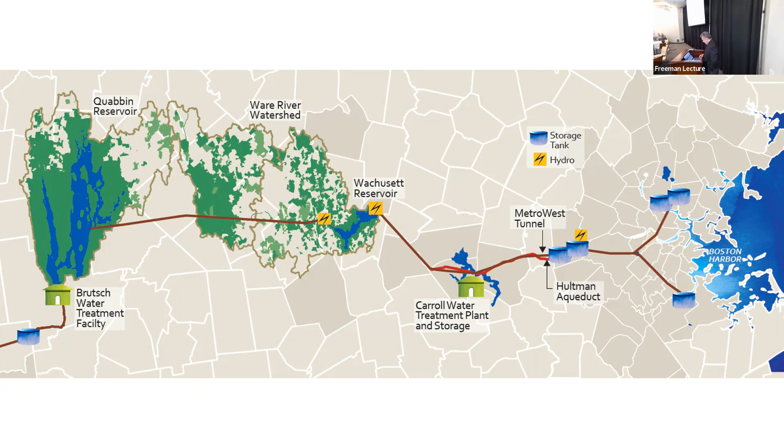Now you've got to know, when I talk tonight, I've got to bring this down a couple of levels, because some of you design highways and get real excited about travel lanes and super elevation. I've got to help you out with what bothers us. So if some of this stuff seems rudimentary, it is, but I'm trying to uplift you.

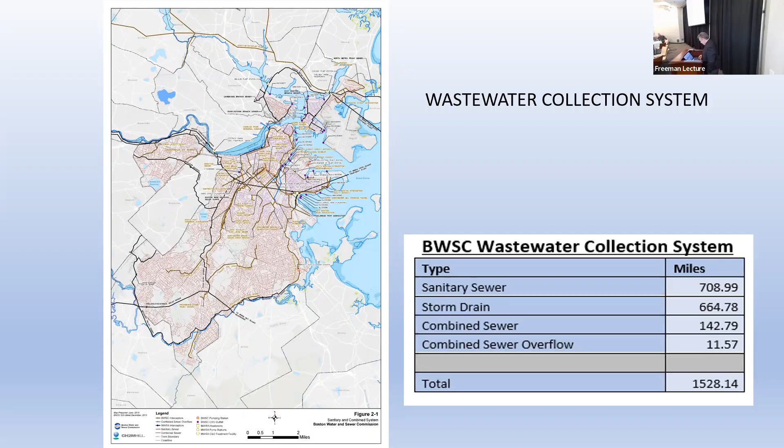We're also studying how we keep the people at the other end, in the southern part of the city, dry also. We have fixed infrastructure, you can't fit any more pipes in these streets. So if we get a lot of rain, sometimes you're going to have to run it down the street or through your backyards, because we can't get it down into a pipe. So you've got to route it or hold it. Now we try to hold it, not in your cellars, that's a plus.

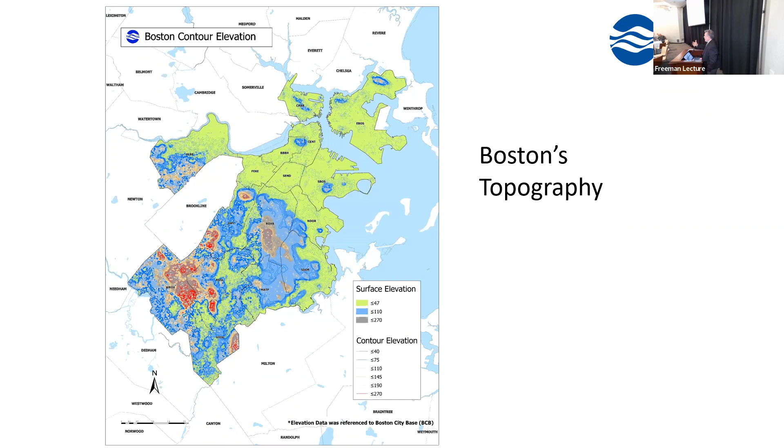And if we're not careful, that's what it's going to look like if we don't take care of our problems with sea level rise. Nature's going to come back and put us back where we were. Now, the only thing I wish is that when they were filling in the Back Bay, etc., they had a brother-in-law that sold dirt and put in an extra 5 feet, but that didn't happen. We came to the elevation that we knew at the time. It worked well, we were high enough. And now we have an issue.

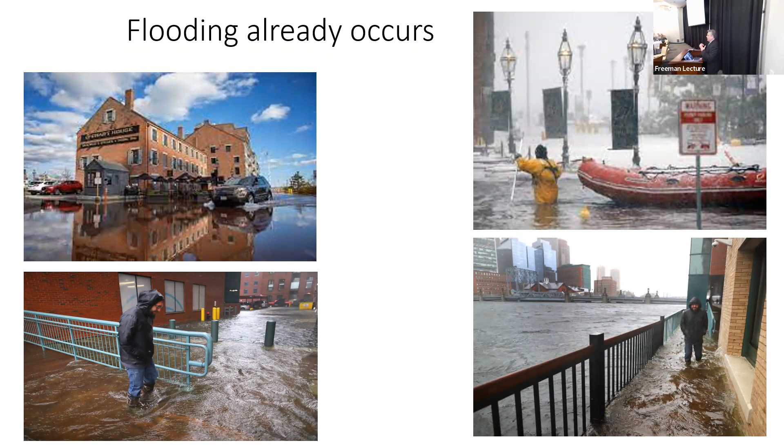So we already have flooding. Flooding already occurs at king tides. If you get on the long walk, you'll see it come over at Tenean Beach, the water comes over. That's along Fort Point Channel. The water comes up on extremely high tide. So we already have it, so we know that's a problem. It doesn't take genius, and we're not going to spend a lot of time studying that, because that's what happens.

City of Boston has done an incredible job studying climate change. They've been doing all kinds of studies. People don't realize how much is there. At Climate Ready Boston, if you Google that, there are studies galore. And they continue to improve also. But we're all learning, all of us. And so we get new information, we'll change it again. And that's what's so important about this, continual learning.

They have two big issues: the heat island effect, which we won't cover tonight, and the issue of resilient harbor. These six boxes show the studies they've done, and you can pull them all up. They did an incredible job working with the residents of the neighborhoods, going around and asking them what do they need, what do you think, how are we going to keep the seas from coming and getting us?

It's extremely important that the residents understand and buy into it, because this magic thing occurs: we want to build something, we need money. Where do we get the money from? We get it from the residents.

So this is important, number one. Number two is renters. You can't assume that people are just going to say government's going to take care of you. Everyone has to be working on this together, because if we have a major problem here, we've got to put people somewhere. We have to find a place to put them, we have to put them up, we have to take care of them. That's why everyone needs to be cognizant that climate change is occurring, and everybody has to be part of it. Everybody has to be willing to add their ideas and take a little hit now and then, a little hit off the chin.

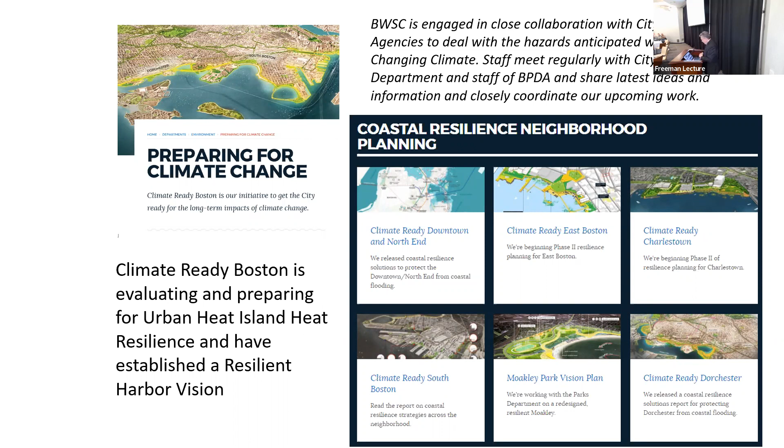2050 is right around the corner. Now, if you don't think so, think what you were doing in the year 2000 — it wasn't that long ago. Now here we are calling in 2022. You'll be reviewing these slides, I know it, for the next 8 years, wondering what the hell happened in 2030 with our predictions. But we continually update them. This is a given thing — this is the new science that tells us this is happening.

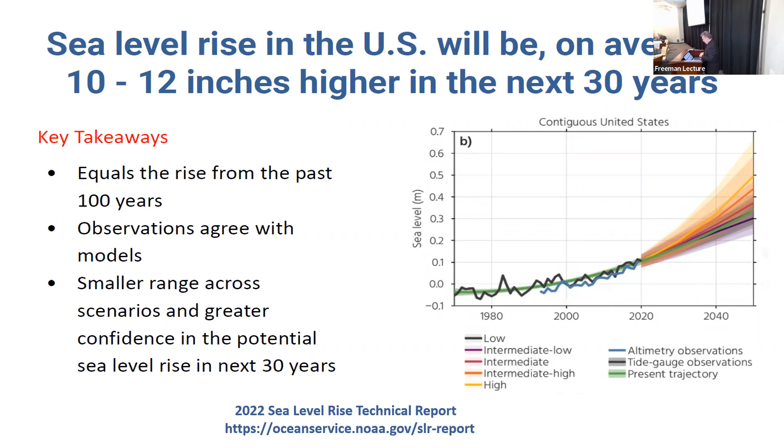It's very important that we look at these and we continually revise them, because people will start building mini levees, et cetera, when they do construction. But it doesn't do you any good because you've got a weak link in every chain — you've got to get the entire thing.

This is something that we keep mentioning to the planning agency also — we have to come up with consistent ways of doing this, they've got to match together. If you're going to build something and you don't know whether the sea level rise is going to be 5 feet, you should make the foundation capable of taking 7 feet of levee. Build your foundation big now — costs a little more money. You don't have to wall the city off yet, but you better have that foundation there, because if we miscalculated, it's going to cost a lot more money to go back and take care of the problem. Or you buy a lot of lifeboats.

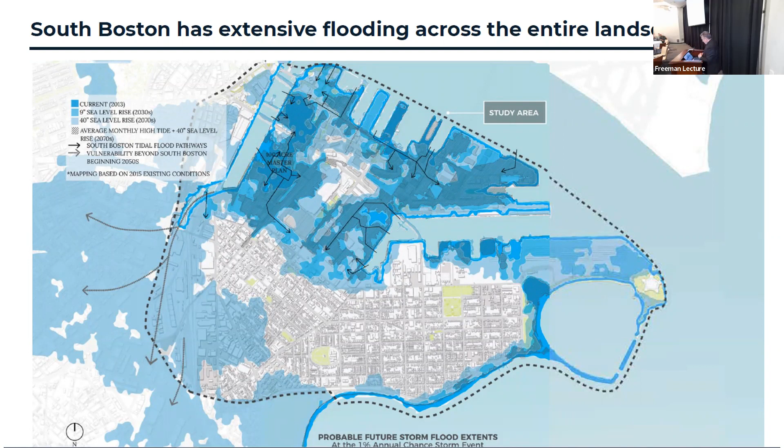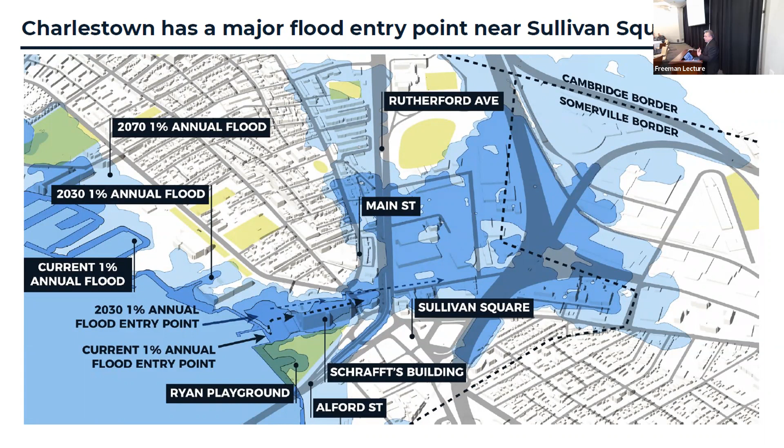The problem is consistency. Everybody's leaving jobs, everybody's disappearing, everybody's retiring, and how do we keep this actively going so that we consistently move towards fixing the city, protecting ourselves, and building what we need to build.

This one here is East Boston, another high flood risk. I wanted to show you this one because I'm going to explain in a minute why the water and sewer department cares about this. I mean, you go on TV and you see devastating floods everywhere, rivers coming up, people living on slab foundations, and their living room furniture floats out to the front lawn — you can replace all that. But we have cellars in the city, and these cellars have been converted to living spaces.

People live there, and that's where we put all our utilities. They're all sitting down there, brand new, and we're all happy about them. Nobody thinks about them because we haven't had the problem yet. We at the commission are extremely concerned about what could happen if this particular one in East Boston hit.

This area here is combined sewers. So with combined sewers, the water wants to go into the catch basin, into the sewer. And this is an unlimited source of water - we call it the ocean, and it'll just keep coming. The good news is there's a thing called low tide.

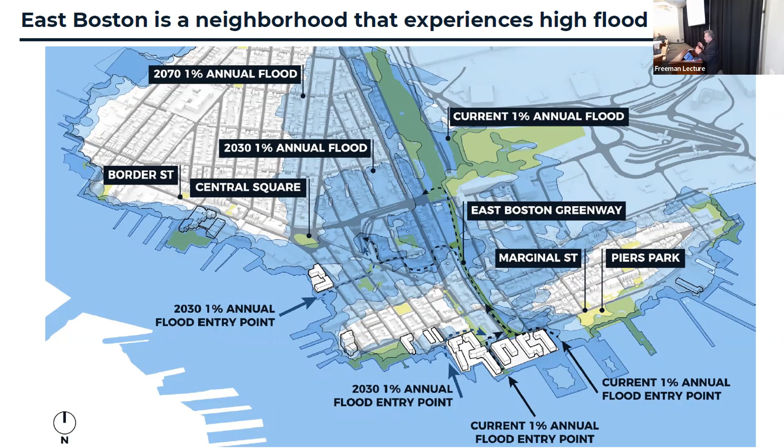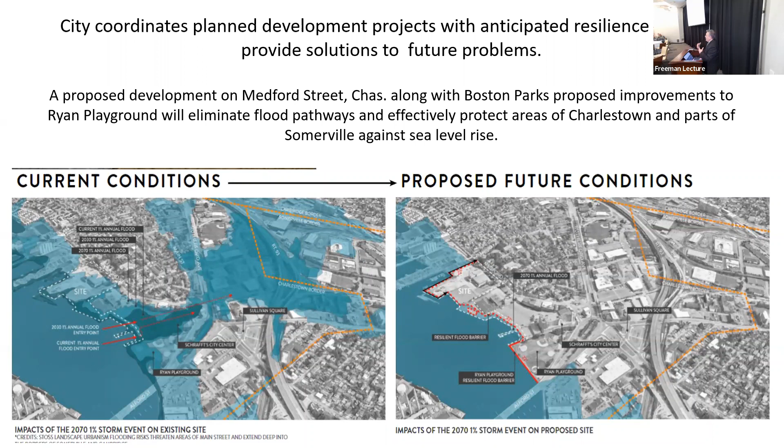So here's an example where the city is cooperating very well. You saw the flow path on the side you're looking at. The city is planning on taking care of Ryan Park - that's the lower piece on that diagram with the red. As they're planning that, the developer at 425 Medford Street is also planning to develop his waterfront. Between the two of them, they will build what we need here. At the end of the day, it's something we can all enjoy - we get to enjoy it, and it gets to protect us. That's the way we have to approach this problem citywide.

So Climate Ready Boston has coastal barrier schemes for everything. I'll just show you here where they go. That's a great plan - I love them, planners. They just draw a line and say, when we build this thing, life will be okay.

Well, there's a lot more complication. For instance, I draw a line and it goes through his property, her property, someone else's property, and a trust property. Who's going to maintain all that on those properties? That's a very difficult thing we've got to deal with as a whole society. We have to figure this thing out somehow.

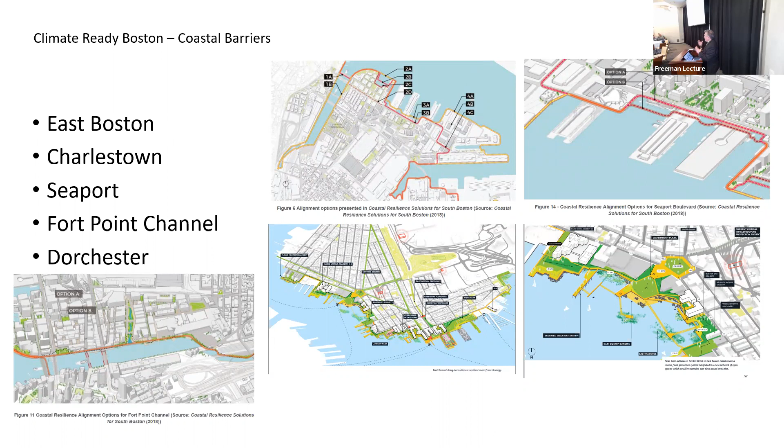There's the elevated waterfront park here - this is the Ryan Park concept. It's a concept; we never build exactly what we conceive, but it looks nice and shows you what can happen - how we can make a public amenity out of something that's saving us.

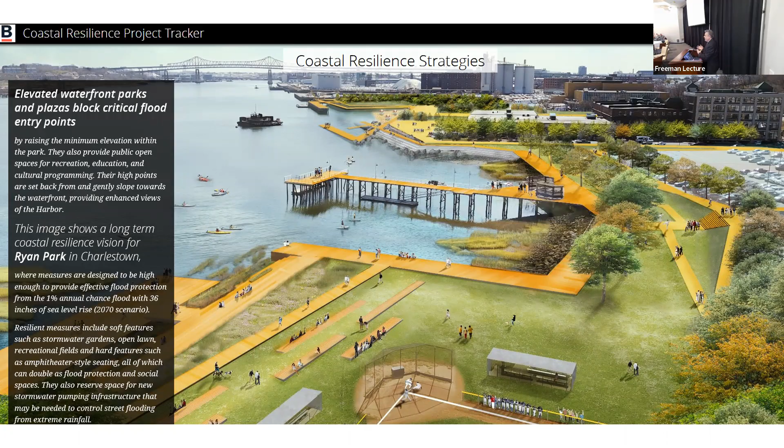The Moakley Park, you may have heard about this - that's an amazing development. By building Moakley Park, they'll simply raise it up. It'll keep the ocean at bay, and people can enjoy it. Because you know what? It's sunny out most of the time, except for the days it's not. That's deep thought from the water.

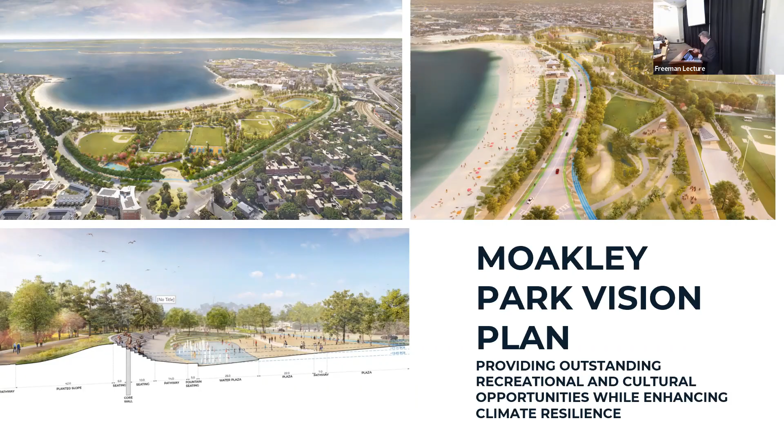The Border Street is another one in East Boston, again really interesting concepts, and everyone's working together, everyone's pulling for them. One of the problems we have with all these great pictures is money - and that's tough, besides the fact that it's somebody else's land most of the time.

There are some that are built - this is Condor Street Wild in East Boston, already built. It shows you what can be built and how it works, and it goes on. Nature-based solutions is what we're trying to use everywhere we can. Kind of tough when you're in the main shipping channel - it gets a little tough, nature-based. Remember though, concrete is nature-based. I'll just throw that out.

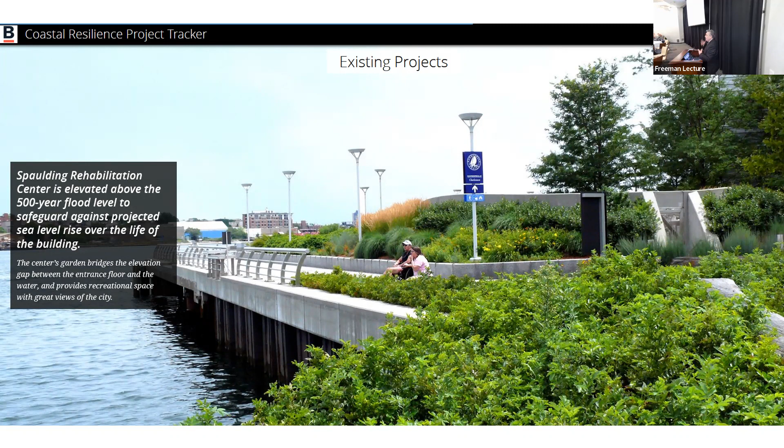Here's another one, Spaulding Rehab. You hear about that everywhere - how they planned for the 500-year flood. It works, and people enjoy it every day, and it's protecting an area.

So when implemented, all the plans, all that yellow, will protect the shoreline of the city, and we will get there. It's just that we need to get there in time. Because if anything's going to make us hustle up this plan, it's one good flood - and then watch how fast we work.

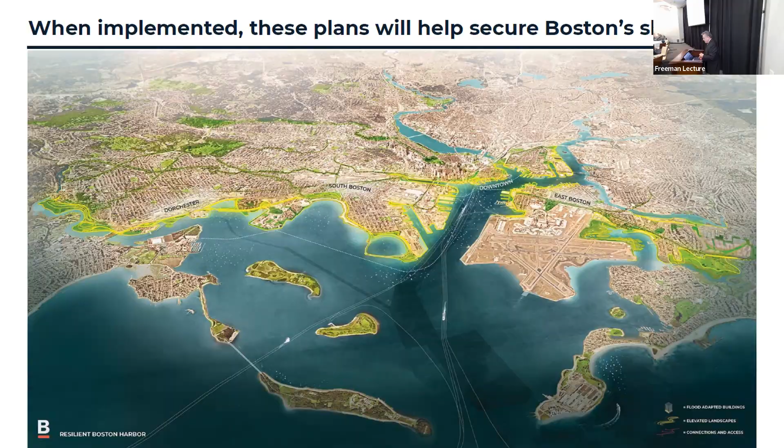There's also the idea of the surge barrier in the harbor - we're not going to go over it in detail, but it was mentioned also in the Climate Ready Boston plan. It's something for the future. But this doesn't work for every single day when the high tide comes. When the tide is coming up high every day, you can't shut off the harbor - can't do it. So you need the onshore barrier for sure, on the sunny days when the tide is super high, so it doesn't come in and get you. So you need to do the onshore.

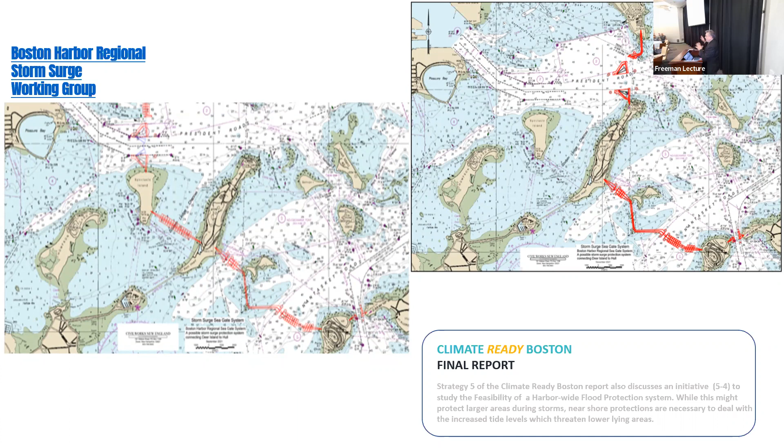This, we can look at a little in the future. There are active groups looking at it. We ourselves in the city are looking at nearshore.

First thing we realized is we needed to have something to get people excited. So we created, working with Hazen, the inundation model. If you've never seen this, this is a really good start—believe me, this is our start. Everyone thinks we did the model, we're gonna go home. No, this is our beginning. Every 5 years we need to redo it.

You can't stop. First of all, there's a lot of input from people. So we did this for the local drainage. It's very graphic. It's the BWSC Storm Viewer. If you don't remember, you can email me someday and I'll send it that little way. But this was put together for the sole purpose of telling the public what's happening.

We did a lot of work on what type of storms happen here in the city of Boston. We did a lot of research on which are the worst ones and what's going to affect us the worst. Because this is going to continue, this needs to be updated all the time. We look historically because that's what we know—we have data. We don't have the data on what will happen in the future. So all this is explained when you get to that model.

This is the screen you're going to look at. Very simple. You go to your far left, you pick a storm, any storm, whatever one you're worried about. You pick your amount of rainfall. It gives you the estimates, and this was our original estimate. They will be revised—how much rain we expect. Now I can't see, you can tell I'm old.

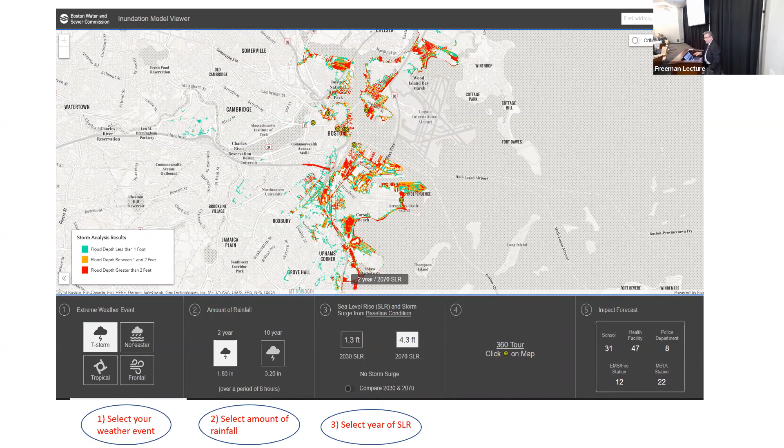Finally, the impact forecast—you can see we tell you how many schools are going to be impacted under this scenario that we have plotted. You can also compare 2030 and 2070, so you can see how bad it gets. Again, public education tool, that's the whole thought of this thing, and it will be updated.

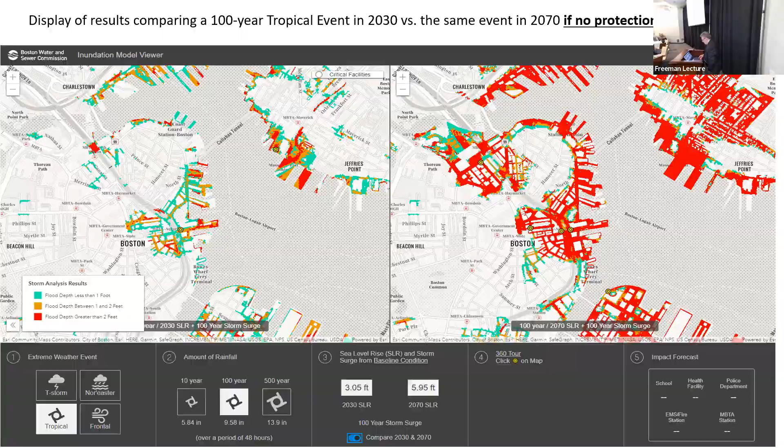So here you would be, if you click one of those little yellow things, what would it be like on a nice day, and then not so nice a day, if the sea level rise were to occur under the scenario you can pick. Likewise, this is down by the aquarium station where everybody talks about, and the aquarium station has protection—that's what it'll look like. They would not use my original picture that had a mother walking her child because the child was underwater. But that was a thought.

We also have Power BI. And what that is, we have all kinds of data on the population, what critical facilities are impacted, which ones there are. Because if we have this flood, we have to put these people somewhere. We have to know where to move them. We have to know what facilities—fire stations, police stations—may be affected.

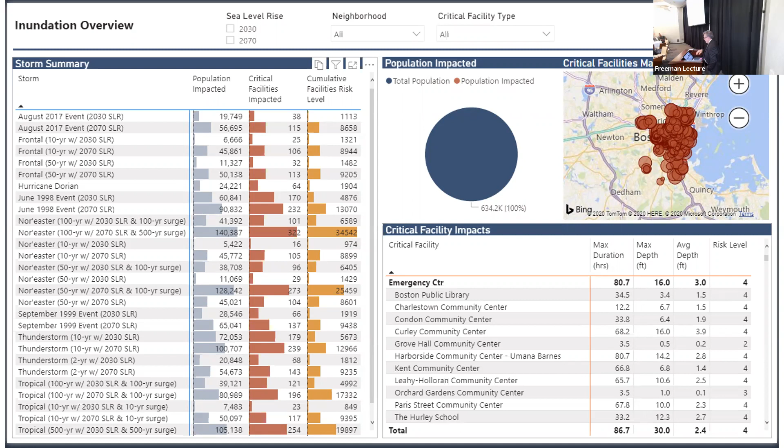What roads can't you drive down? On that map, if you zoom in on any of those colors, zoom in deep enough, it'll tell you how many feet that level of water is. So you can say whether you can drive down the street if it's 6 inches, or whether it's 4 feet and you can't do anything. So again, this is the model, this is to educate the public to see if we can get everybody interested.

So we know that if we build the walls, which is the upper left-hand corner there, we can, at super high tides, with tide gates that are on our pipes, protect—on a nice sunny day, you will not drown if we implement this whole thing. We know that. We've been working with the city, we gotta pick it up.

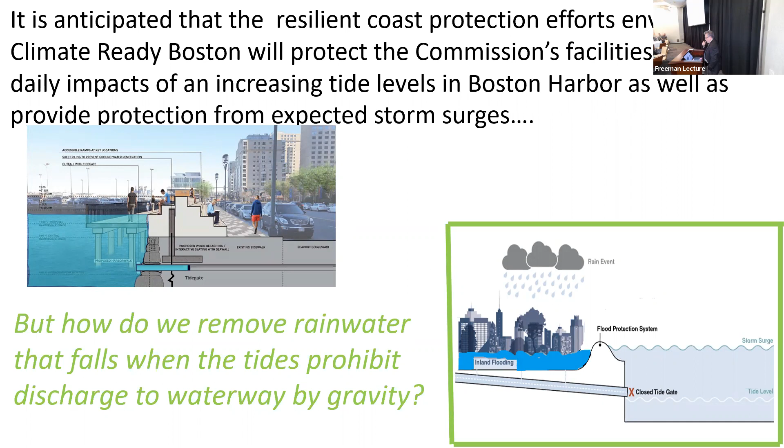Problem we have is, and it was asked in many communities, what are you gonna do when it rains out? None of these studies looked at the rain. And guess what, you know, we talk about the word storm surge—the word storm brought up the idea that it might be raining now. And we are believers in gravity. All of our systems, except for one major pump station, flow by gravity into the harbor or into the rivers. So that is not really good for us with the flood barrier and the rain zone.

So I just wanted to show you a couple of things, for all you hydraulic engineers or wannabe hydraulic engineers. This is what happens when stormwater flow comes over. We have holes under the ground. And if the stormwater flow gets into the building, it doesn't have to get into cracks, it can blow through windows. Three or four feet of water is pretty powerful stuff.

It gets into the basements. And if you've got anything downstairs, and everybody seems to have a toilet or a sink or a washing machine, the water can flow backwards into our system. So all of a sudden, our sanitary system, which is expecting only an occasional flush or a great shower, is getting this inundation of water coming down through buildings.

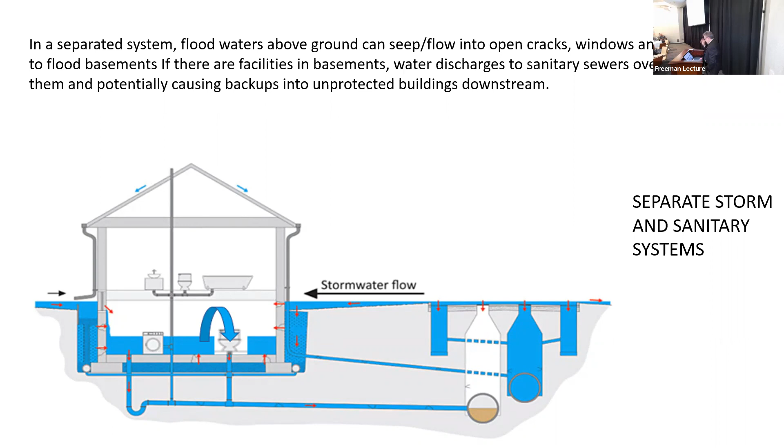So this isn't something we make up. This can really happen easy. So if that's the case, the guy downstream has got this sanitary sewer chock full of sewage, and he's minding his own business. He's not getting the flood water, but the sewage can come back up at his house.

And in that case, we have back water valves you're supposed to have in your house. Believe me, if it's in your house now, I challenge you to tell me, first, where the hell it is. Second, when was the last time you took it apart and made sure it was all clean? That's something you do early in the morning.

So I'm just telling you, they're required by law. They work when you put them in for about an hour, and then they start getting fouled because debris, wastewater is flowing by them. Things get hung up.

So you gotta watch this. But this is what happens. So somebody winds up with all the neighbor's sewage in their basement. And that can take out your burner, that can take out your electrical panel, that can take out your brand new drywall you put in, so the mold can grow because it gets behind there, it gets in with the insulation. So this is a major public health potential, and it happens.

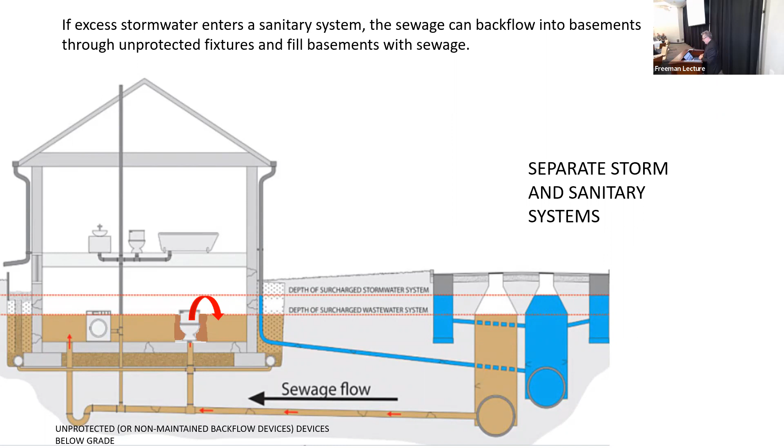I know people don't think it does, but it happens. We know because we get the call. On a combined system, when I showed you in East Boston, even better. We fill up that sanitary sewer even quicker.

If we can't get the water out, sewers get full, boom, up in the basement it comes. And you don't need all your backwater valves to fail, maybe a couple are working, all you need is one that doesn't, because this is an unlimited supply of water coming at you.

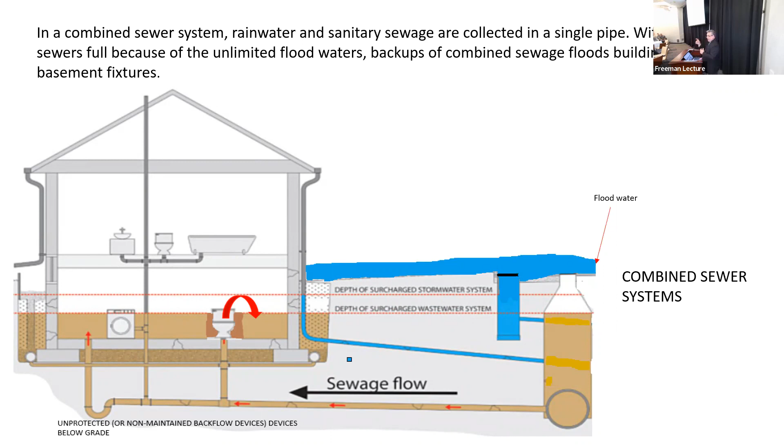We're also doing continual infrastructure improvements. MWRA worked with us over the last 15, 20 years. Incredible amount of infrastructure improvement, incredible amount of CSO separation into two separate systems. And it worked really well.

We also identified 2 more areas that could get additional separation: East Boston, with 230 acres, and South Boston, with 400. The South Boston project, we already started. But the key point is we're going by gravity, guys. All gravity, no pump stations yet, because we haven't come up yet. So it's a balancing act.

I show you this color because all these colors are where we've already separated sewers. Everybody talks about Boston being this big combined sewer system. We're not. We're very few, but they are powerful, those combined sewers, the ones that we have.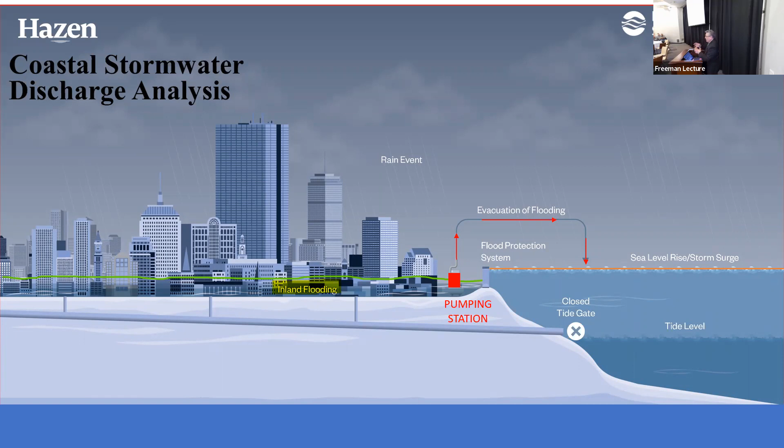How do you get rid of it? You pump it. That's typical engineering solution 101, because that's what everybody does. Everybody has pump stations. Everywhere you go, every city talks about them. New Orleans has the big ones, but that would work here in Boston too. But we're also trying to reduce our carbon footprint, so what do we do now? This is a little bit of a problem we're looking at, so we've got to think a little differently.

So we looked at sea level rise and storm surge, and I told you the initial numbers we had. Then we want to come up with new designs. What can we do besides just plain old building a pump station?

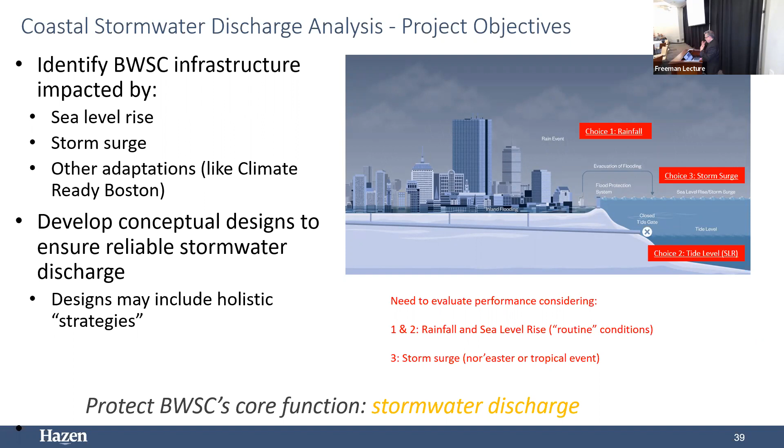So here's one of the problems: those tide gates I was telling you about. Right now we know about 595 of them. The Boston Water and Sewer maintains theirs and checks theirs, we check them once a month. We're also putting devices on, so if they're backflowing, we know about it. But take a look at those numbers, we own 268, and a bunch of other players own a bunch too. I'm not sure the primary purpose of MassDOT might be to worry about a tide gate. That may not be high on their list.

There are other ones, there's also a bunch of unknowns, and we don't know where they are. We see them sticking out of the wall. We don't know who's going to flood. One of them alone will defeat the purpose of a levee.

So this whole issue is something we're going to be looking at. I just showed you a couple of pictures to see what they look like. They can be on the outside of the wall, or like this one on the right-hand side, which we installed down by A Street. And they're not cheap, this one cost us $1 million, and they're tough to maintain. They're like the backwater valve, maybe not as yucky, but it's pretty tough moving this thing and exercising it. You've got to be on them all the time. You're putting them in an environment with a little bit of wastewater on this side and salt water on that side, just what you want for non-corrosive purposes.

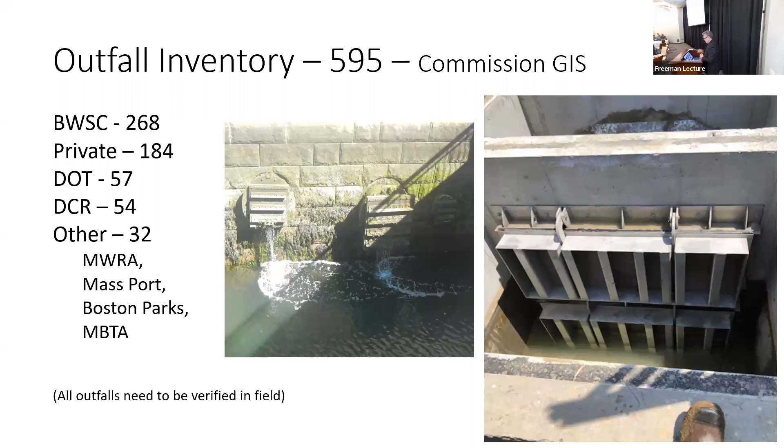So we took a look at all the sites. We looked at sites with multiple outfalls, we've got to bring them together. You wouldn't build a pump station at each outfall, you'd bring the pipes together with an interceptor and bring it to one spot. We have open space opportunities, that's the nature-based solutions I talked about. We always look at parks, we look at parks differently than most of you do.

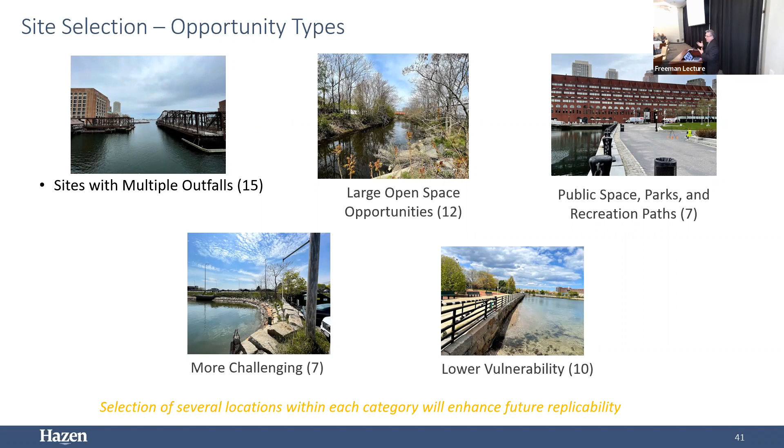But we look at the opportunities that parks provide, since it's a public place. Of course, Article 97 tells you it's not free, there's a lot to be done with that. And then we have more challenging areas, and then we have low vulnerabilities, some places they can flood, so it floods a little spot, nobody lives there, we'll put them at the bottom of the chain.

So we took a look at the outfalls. We wanted to do phase one, we wanted to take a look at how many sites we can do right off the bat, because you can't do them all, you can't study them all, and also you need to learn. So do some, make mistakes, fix them. And that's the big thing, we understand we will make some errors, but we're smart enough to realize and acknowledge that, and keep working.

We don't worry about the Charles River, we're praying for that dam, John Freeman's dam, that's the one. That dam works well, the Army Corps did a hell of a job. It protects all of us, it protects Cambridge also. By the way, if you look at our maps you'll see Cambridge. You want to buy some houses, buy them on our side, we don't flood as much, just throwing that out there. But it's very important that the dam be maintained.

Right now it's working, and more things work well, but we've got to watch that, because of the amount of damage that would be done if that dam fails. The Back Bay floods, and the Back Bay is combined sewers. I showed you what happens in combined sewers: you get not only the rain, the salt water, but everybody else's sewage too. So we don't want to be there, that's extremely important.

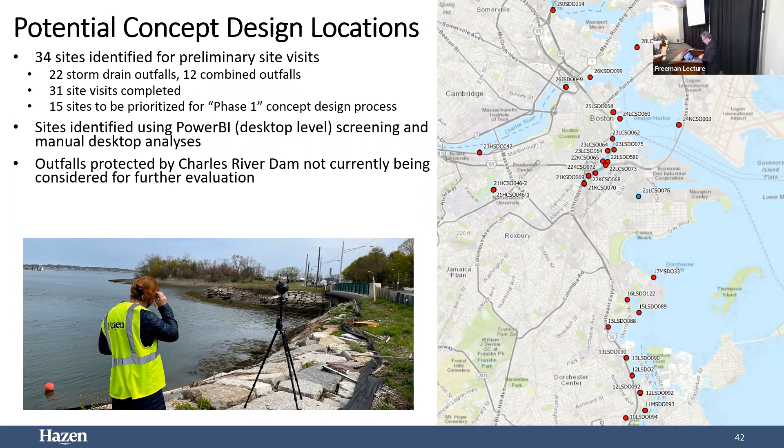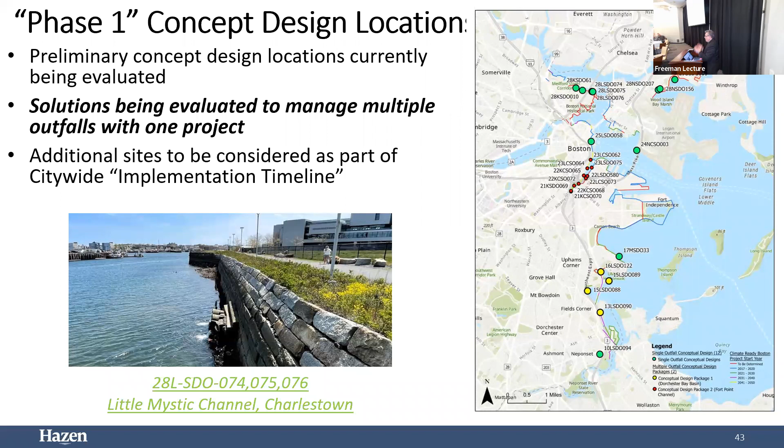So we have phase one, because you always start somewhere. We looked at the different outfalls. How can we join these together? What can we do? We don't want pumps. We don't want pumps. Because we do have a pump station.

So our Union Park, it takes over 778 acres of the south end. It used to flood all the time, but in 1913, they invented electricity, so we didn't have to have a coal-fired pump going all the time. We could flip the switch. So we originally had an electric station there.

Everybody was happy. In '76, we built a gas turbine fired one. And then people said, well, this is great. I said, we'll move everybody downstairs. Well, in 1998, we had a failure of the pump station. And thank God no one drowned sound asleep after drinking wine all night, because it failed at night.

These are the ideas. Everyone has a backwater valve there, by the way. Not every backwater valve works. So we know the devastation that can occur. It also is huge, pump station. This one here can pump over 300 MGD, and that's to take care of 780 acres.

We got a whole bunch of acres out there. So this is the problem. By the way, I didn't mention, we don't own any land. So if you see me eyeing you and smiling at you when you're standing with your green pastures, now you know why. We need to put our stuff on your property. And by the way, if we have to pay you, then we look to our customers. And if you're one of our customers, you can see the cycle.

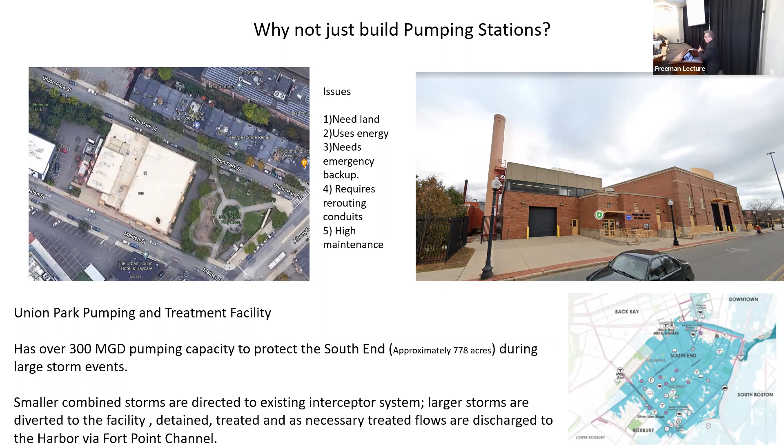It's an issue. So this works well, very well, but it's something we would like to avoid. So we can pump. That's an option. Everybody in the world does it. Everybody loves it. But we're trying to reduce our carbon footprint.

And by the way, solar collectors don't work during a storm either. I'm just throwing that out there for everybody that says use solar. Not that you people with the higher education field would say that, but people have said that to me. Why aren't you just getting gigantic batteries, collecting the energy from the sun and turning it on? It doesn't work. So we can build underground storage.

Very common, big, large tunnels down underneath the cities. Milwaukee's got a bunch of them. They work great. But guess what? When they fill up, you gotta pump them out. And that's called energy, and that's what we're trying to avoid. We love gravity, so we're trying to keep working with gravity.

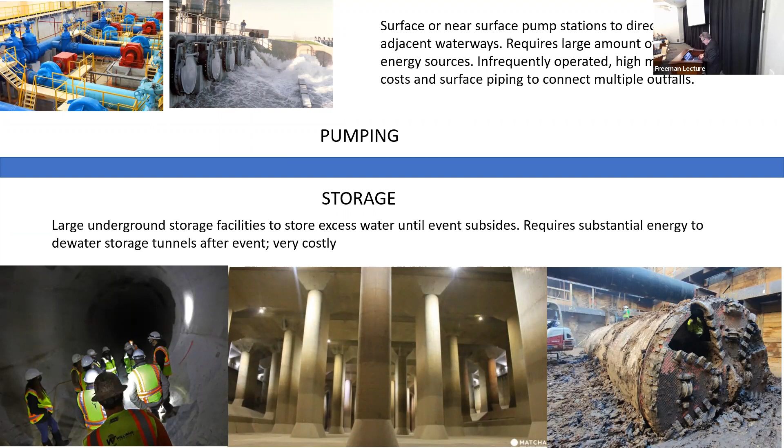And that's not the reason we want this done. But we're in it, as is Boston Medical Center - nice place to keep dry during emergencies and problems. So Amtrak, the whole rail winds up here. So we looked at this and said, well, what can we do? And so the challenge is just what I've been telling you: high sea level, we can't drain during high tide. So what could we possibly do?

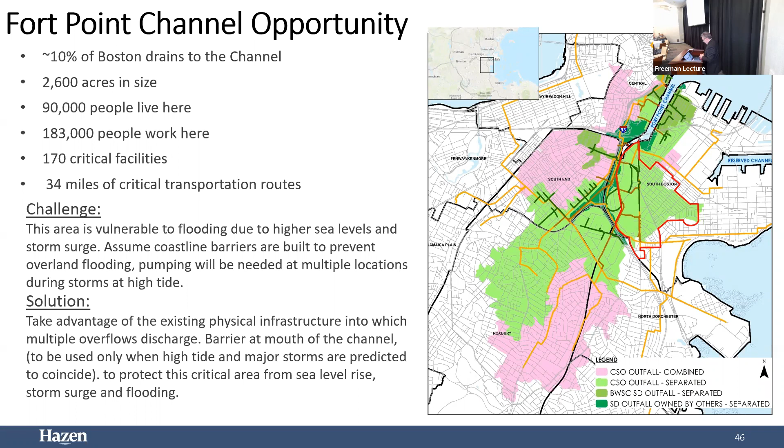We're gonna separate. And then I said, ma'am, we're not worried about pump stations because we'll worry about that a little later. Well, now it's later, so we're worried about it. So you can see all the problems, all the tide gates. And where would you put, if you know that area, where would you put your pump station? Along here.

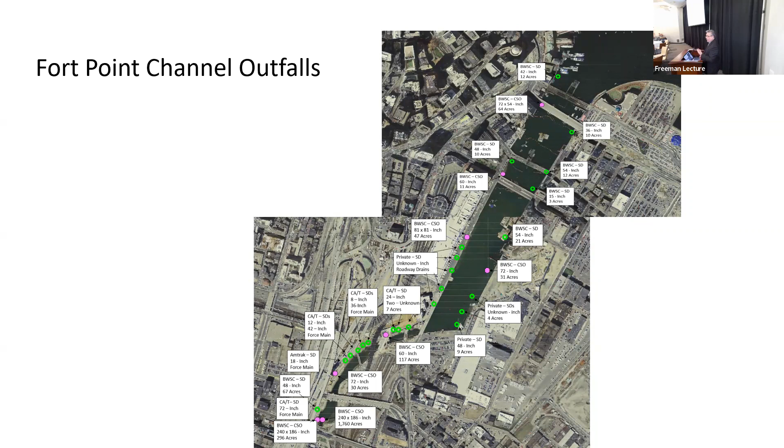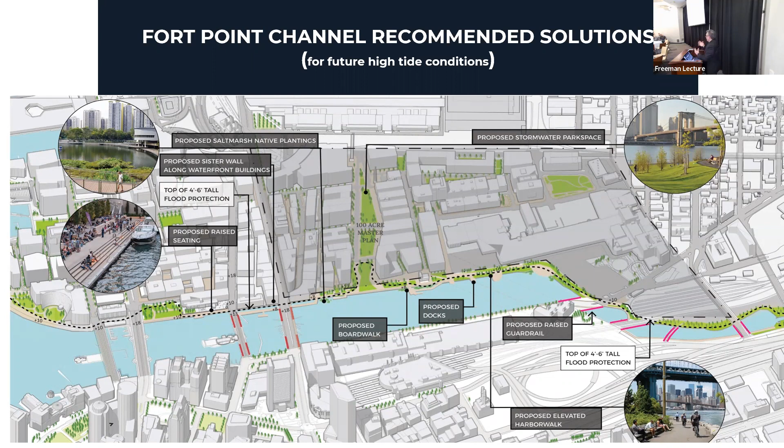The city is building the sister wall, you may have seen that. They're going for a grant. Great idea, because every day, twice a day, we get sea level, up it comes. You gotta keep that from coming in at us. So we like this idea, we think the city should do it. They're cooperating with everyone, the old GE headquarters site of Gillette. It's gonna work, and it's a good trial for us, because we learn. This is how we learn.

Our preliminary assessment of effectiveness, you'll see it in January when we have the final report. You can see how well this idea works for us.

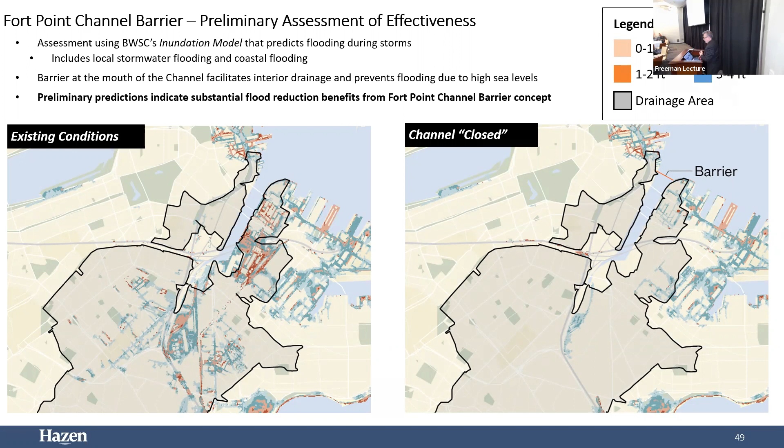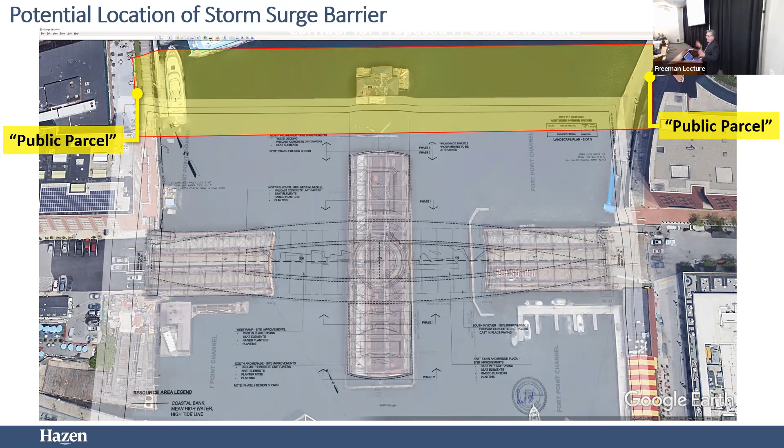The idea had hit the Boston Globe a couple months ago, and we said we should put a storm barrier between the federal courthouse and the Coast Guard building. That was our first idea, and it was a good one. The reason we said that is because the city of Boston was going to build the Northern Avenue Bridge, and they had a beautiful design from a public process. It included an observation deck, though every time the tide came up high, you'd better be on the second deck.

So now we have a new concept, and this is where the disclaimer comes in. I think it's a real good idea that we should be the base of the Northern Avenue Bridge. The bridge should be like the one over at the Charles River Dam, a dual function structure. Every single thing we do should be dual function. Why wouldn't the foundation of a new bridge be a place where we could station pumps inside for storms bigger than expected?

We could come in and out during the day, build observation platforms, do all of that, and put a bridge on it. And it wouldn't be ugly. Try that one out, because some people have said a barrier is ugly. We've seen it in New Bedford, we've seen them over in the Thames. They're big, they're ugly. This wouldn't be ugly.

In the lower right-hand corner, we would have a gate sitting underwater. That gate would remain that way until we knew a big storm was coming. At low tide, the water drains out of the channel anyway, every day, the same thing. We're not touching anything environmentally. Water drains out, we lift up the gate, and now we have a gigantic bowl.

That bowl can handle 10% of the city for a 10-year storm event. That's a big bowl. And every six hours the tide comes up and down, so we may not ever have to pump, depending on when the tide cycle comes. You might be able to just let the water out from the gate. This is a picture of what it would look like with the gate out.

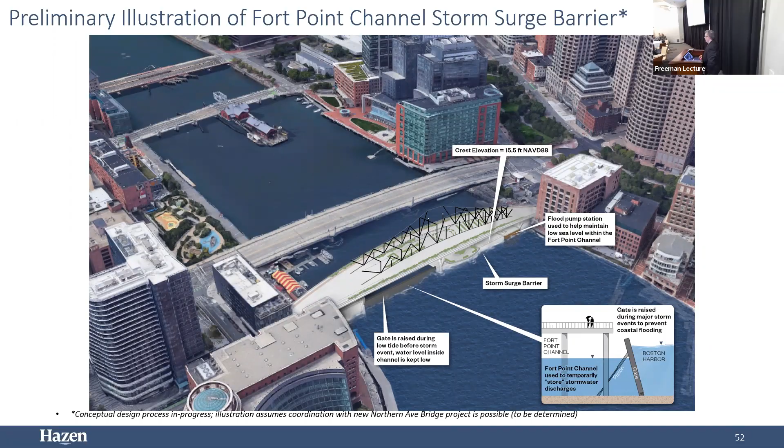So we work closely with the city, though they haven't heard this yet. If they're on tonight on Zoom, they have now. But we'll see, and it has been recorded.

They're going to build up Morrissey Boulevard, raise it, and make that our barrier, a roadway being our barrier. Excellent. We took a look at this and said, well, what can we do?

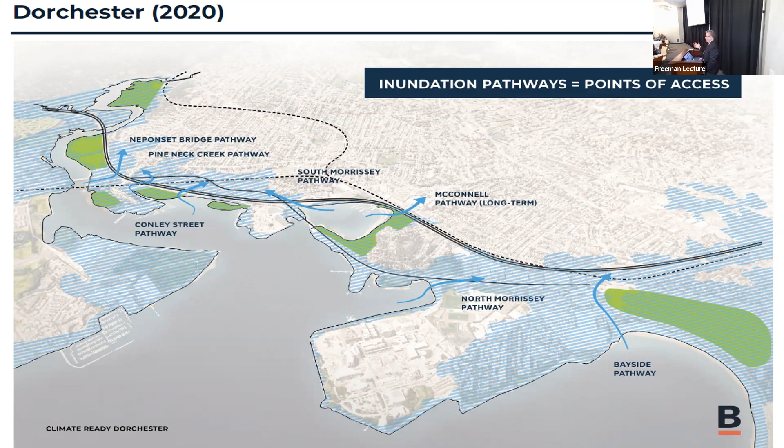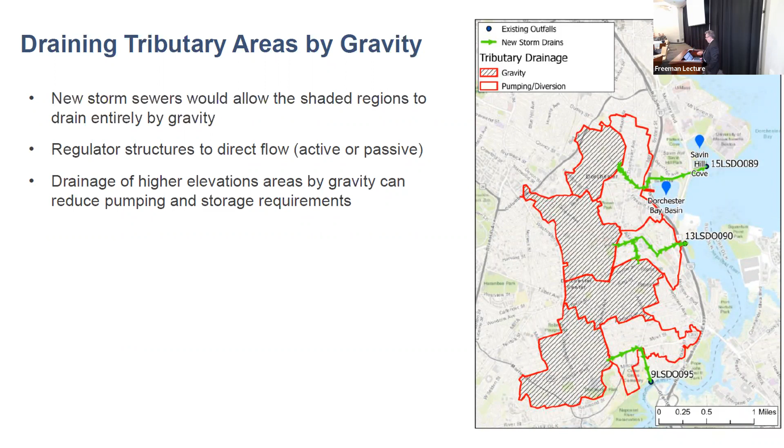We looked at how we can get the water out from the top part. And the lower areas, could we pipe those to Dorchester Bay? Now, every single environmental rule and law tells me we can't, so we don't need those kind of questions, because I know that.

Here I am admitting, but maybe we change. Maybe we decide we survive, or we go broke, or we flood. I'm not sure what the answer is there. It's going to be choice A, B, or C. That's why there's always 3 doors you get to pick from.

So here's something: if we build this system, we can still bring it to a pump station. We can still pipe those lower areas to one pump station that we build inside the environment and discharge to the bay. So it works, but we haven't developed it further.

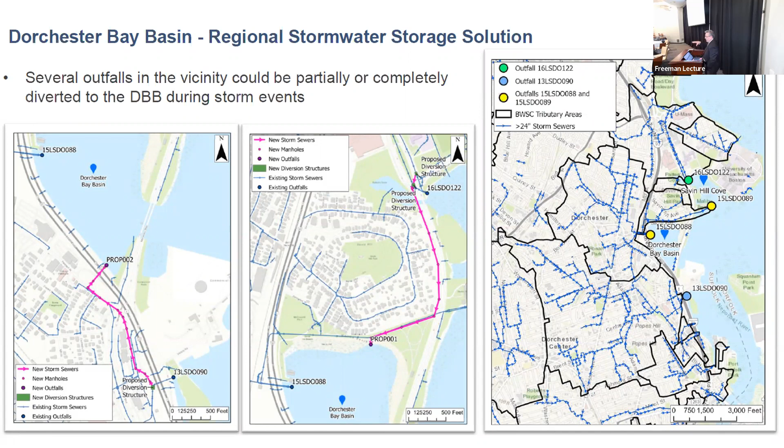Again, this is DCR land, so now we have some new friends. DCR, let's use your land and put our pump station on it. And by the way, these pump stations are really cheap. So this is what it looks like, the artist drawing.

You don't necessarily go to the beach during the one high tidal cycle when it's raining like hell. You don't do it, you should be doing it... you might do it. But that's an opportunity where we could build and be able to close off that.

We would protect the rest of that part of the city. It's a big basin. We can hold all kinds of water there. And we bring the gate down, and gravity discharges it. We don't have to use any type of mechanical equipment, it would just discharge. We show in here a potential pump station.

We don't think we even need it. We think if we reroute all the higher areas, it works. This has not been vetted by anyone. You guys are the first. I know you're feeling proud.

But we'll see where this goes, and it may not be possible. The neighborhoods have a say, the DCR has a say, beach people have a say, we know that. But they already get stormwater today. And this is a question: how do we as a public want to pay to protect ourselves?

So that's why we throw these ideas out, and then I'll drive home real fast. This is the whole idea that we need to always be considering: what are we going to do?

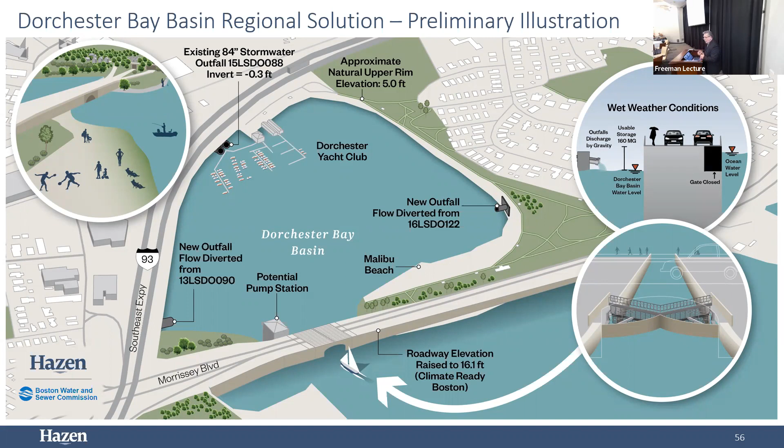44% of the areas that we believe are vulnerable can be handled by these 2 projects. No pump stations, we believe we can get away without them. Gates, we think it'll work. We don't know what it's going to be like in 2070, but this could be the precursor.

This would be the foundation that I spoke about. Build the big foundation with room for a pump if you need it. But you don't build a pump right away, because you may not need it. You build the piping, because you're doing the work.

When they build Morrissey, we want to throw a big pipe down there. It'll either go to a pump station, or it'll go to an embayment, whichever one. We're still working these numbers. All numbers I give you tonight are preliminary, and even after we build it, they may be preliminary. Just throwing that out there.

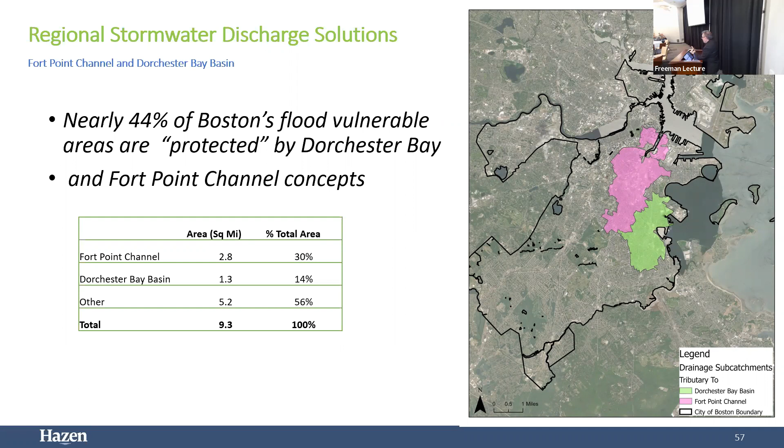The other non-coastal areas we're working on, this blue area, is the Stony Brook watershed. 1/3 of the city drains from one area, Stony Brook. The old Stony Brook runs right outside here in the circle, which we occasionally remind Northeastern by making sure it surcharges so they can see we're there working hard, making sure their backwater valves work.

And the other one comes out the gatehouses, 2 gatehouses down the Fenway, if you've ever seen them. And that's where we operate. That's a tremendous amount of water. The pipe is huge, underneath Huntington Avenue it's 13 foot by 26 foot. That's one big pipe, and you can't put it anywhere else. You can't get anything else in Parker Street, because that's us, all of us in the pipe.

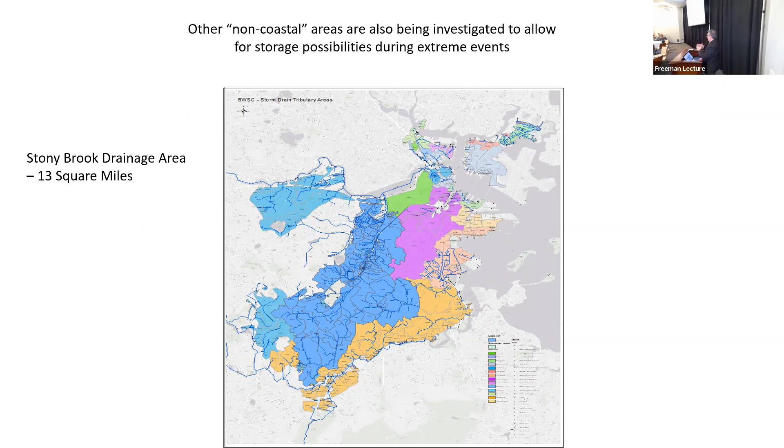So that whole area, we looked at upland. We need upland storage. We've identified a bunch of places we can hold water, because it's in the natural brooks. Of course, we don't own the land. Here we go again. And there's all kinds of other problems.

And they are environmental problems. Things that we wanted to stop and clean today, we may need to overlook during a bad storm. I'm just throwing that out there for consideration. And if it's a good idea, it is mine. And if it isn't, then I have some staff down there, they can take credit, because I'll be gone by then. So these are the regulatory considerations I want to throw out there.

You've got to change the wetlands and water bodies and stuff. Vernal pools, we worry about them, the trees and that - how often might we flood these things? We don't think these storms are coming that often. Can we temporarily flood something and then it comes back? Isn't that what nature does? It does it by itself. We just need to mimic it better and make sure we protect it.

And it costs money, I got that. I'm not going to read all these, but one of the key ones is that thing on Northern Avenue. We need an act of Congress for the navigable waterway, since we're shutting it only for a couple hours - we need a physical act of Congress saying you can do that. But we'll get that, because they already did it for the Moakley Bridge. If we start now, we might get it done in 30 years. And then, of course, I think the more critical one - we don't own any land. So here we are trying to protect ourselves, trying to make it all work, and we don't own land. And we don't want to own land. We want to use the natural resources that we all own as a public.

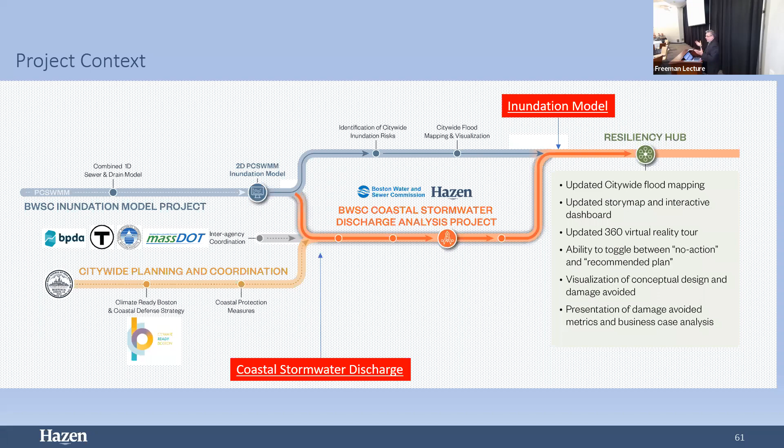So you can do the water scenarios - we can all do the water scenarios to see how many people may be impacted, what facilities may be impacted, what is the most important thing for the city to do. And that is extremely important, because everything I've shown you says that's if we do nothing. Well, that doesn't get you so excited. You want to see how can we prevent it? What should we do? What should be important for us?

Not that this is without controversy, but the question is: should Boston Water Sewer be running around trying to take care of everything every day? Or should this be the - and you'll love the name - Massachusetts Coastal Defense Agency? I mean, it sounds important. And we can turn the Charles River Dam over to them too, right off the bat, and all the inputs from all of us keeping the city alive.

Do we need a new agency? A new governance? Do we need state formed? Because they can take easements - it's amazing what the state can do here. They can do whatever they want, and they can assess costs. They operate pump stations, they can do that. And constructing impoundments - oh, that's right up the state's alley. So I would advocate that we need to soon figure this out and get this to them sooner than later, and figure out how we're going to get the costs, because it's all of our problems, not just the people on the coast.

And this is another self-serving comment - if we lose the seaport, nobody goes to the seaport. Nobody runs the air conditioning and cooling water. Nobody flushes. Boston Water Sewer loses customers. We don't have money. This is not good. We need customers, we need them flushing every day. We want them out there being hot and sweaty, turning those air conditioners on and making cooling water. That hurts us as well as everyone else. The restaurants aren't working, nothing's working.

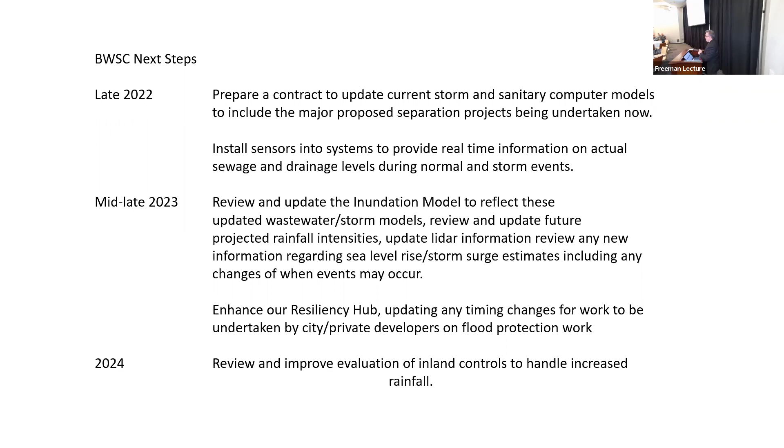This important message, I said there wouldn't be any takeaways, well there's a couple. We're the first ones to really feel this climate change. This is really happening. At first there were deniers and all that, but there's no denying this now. It's happening. And we have a responsibility to the kids.

Just do something now, because if we don't do something now, there's serious problems and consequences to face us. And that's not just on coastal, that's on the heat island too. That's a very important part.

We got to figure it out. It's all of us together, whether we like it or not, because we're the only ones that can control it. And if we don't control it, you can see what the consequences might be. By the way, if you turn on the news every night, you can see the consequences across the nation. There's all kinds of problems out there.